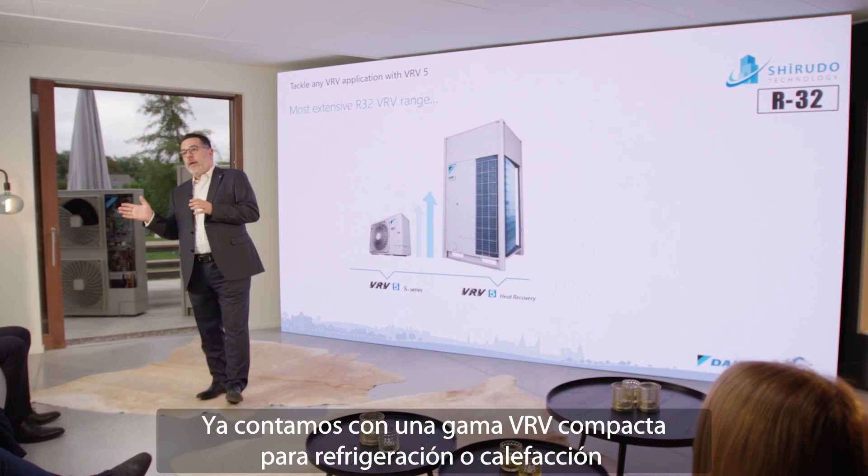Already today, we have a compact cooling or heating VRV range starting from 12 kilowatts and followed by a heat recovery range reaching up to 90 kilowatts in heating. Today, we are proud to introduce an extension of our heat pump with both side and top blow units, completing our portfolio.

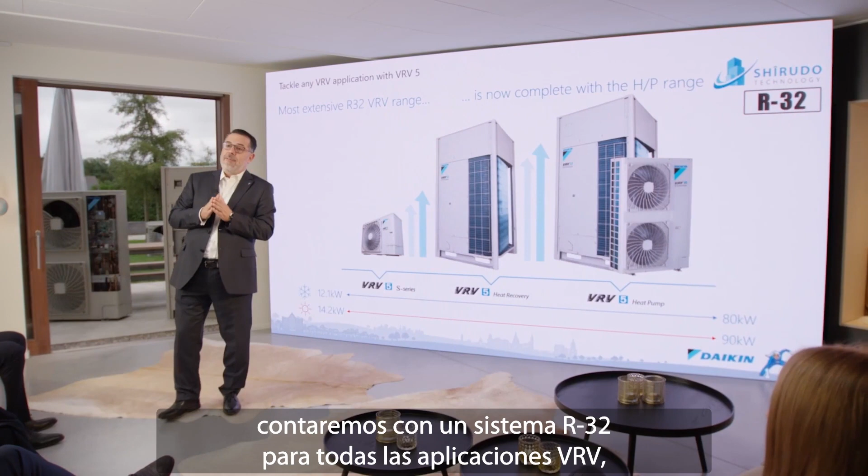This is the most extensive VRF range in the market today with a lower GWP refrigerant R32. As of the beginning of 2024, we will have an R32 system for every VRV application. And all this with all industry standards like continuous heating during defrost, integration of fresh air units, variable refrigerant temperature, a Daikin first, and all this optimized by innovative control technologies.

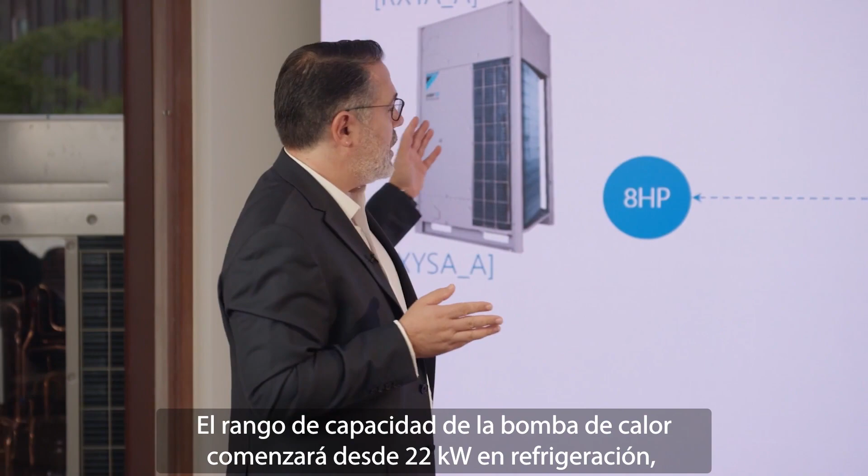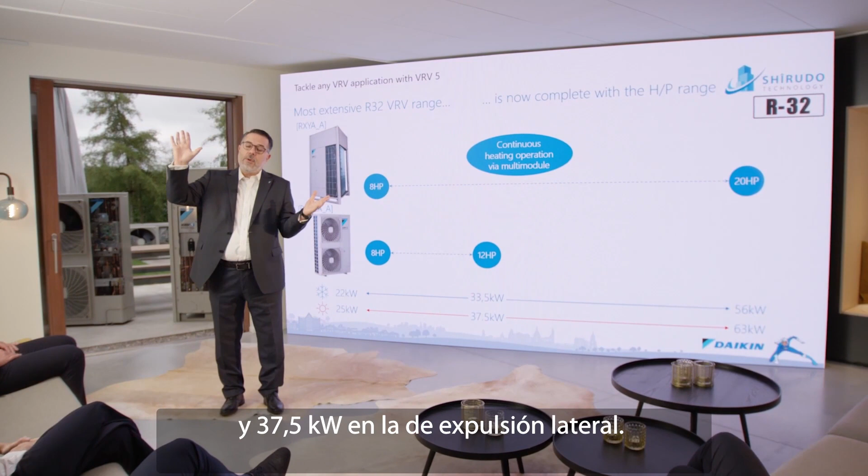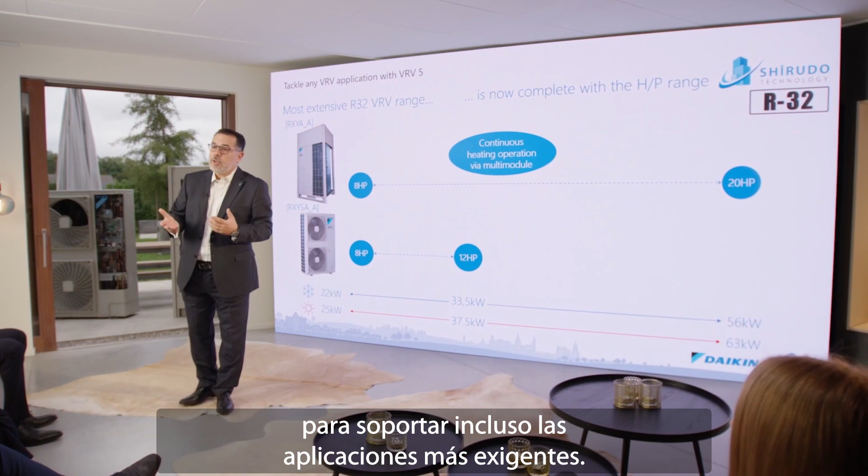The capacity range of the heat pump will be starting from 22 kilowatts in cooling, and it will go up to 56 kilowatts for the top blow and 37.5 kilowatts for the side blow. The units of the top blow range will also be offering continuous heating during defrost, another Daikin first, to support even the most demanding applications.

Climate is not changing—unfortunately, the climate has changed. Longer periods of hot and humid weather conditions and higher temperatures are not an exception anymore. For our new top blow range, we are extending the upper limit in cooling operation to 52 degrees, while maintaining this limit for side blow at 46 degrees Celsius. At the same time, you will be enjoying the same very extensive operation limits in heating, down to -20.

Many times we talk about comfort, wrongly referring to only room temperature control. Sound levels are as important, and this is increasingly tackled in legislation. I'm quite sure that all of you have been challenged with requests about sound levels.

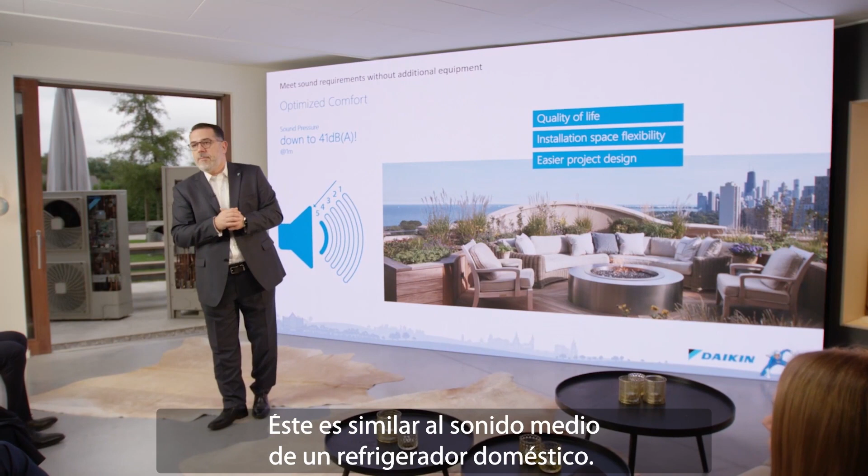At the lowest sound step, the system will operate in standard conditions with an operational sound of only 41 decibels. This is similar to an average sound of a domestic refrigerator. Of course, we will provide you with a full set of data of capacity for the different sound steps.

VRV systems have become a game changer in the commercial buildings market, also thanks to the very extensive piping lengths and heights. We analyzed thousands of designs done by our selection software and checked with market stakeholders, confirming that the piping lengths and heights offered already for many years by VRV4 are more than enough to tackle any VRV application.

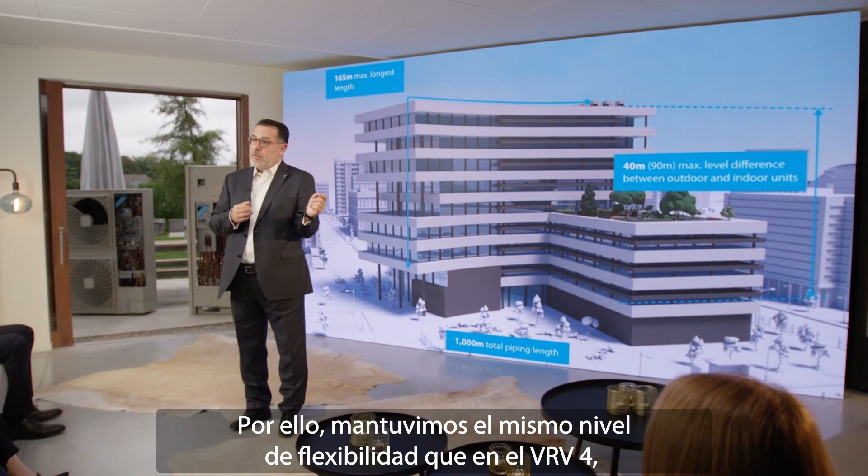As such, we kept the same level of flexibility as for VRV4, allowing, for example, total piping lengths of 1,000 meters, height difference between outdoor and indoor units up to 90 meters, and so on.

At this point, I want to remind you of the key elements that made VRV technology dominate the building market in the last 40 years. VRV is a top efficiency system that truly requires the least installation space and reacts to building load variations in minimum time.

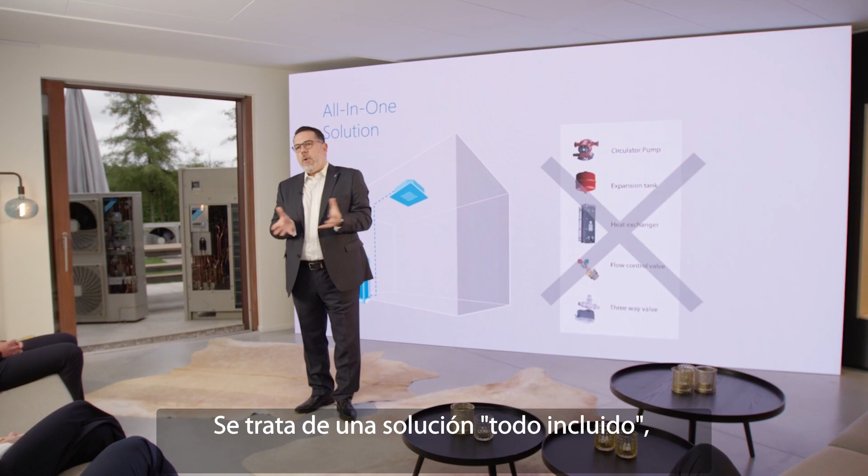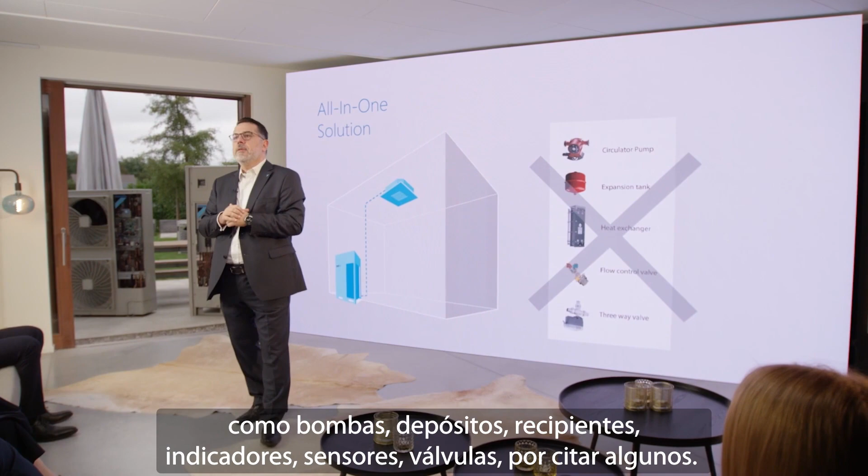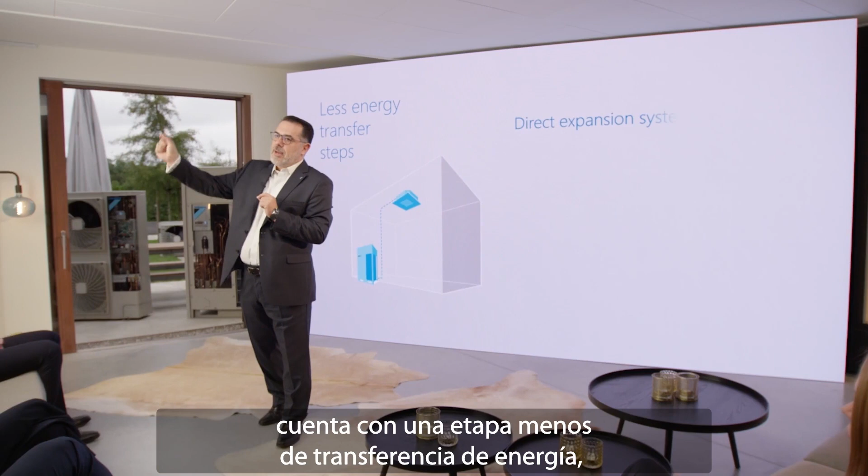It is an all-in-one box solution, not requiring any additional components such as pumps, tanks, vessels, gauges, sensors, valves, you name it. At the same time, referring to the thermodynamic laws, being a direct expansion system, it has one step less in energy transfer, making it impossible to supersede its efficiency by an equivalent air-to-water system.

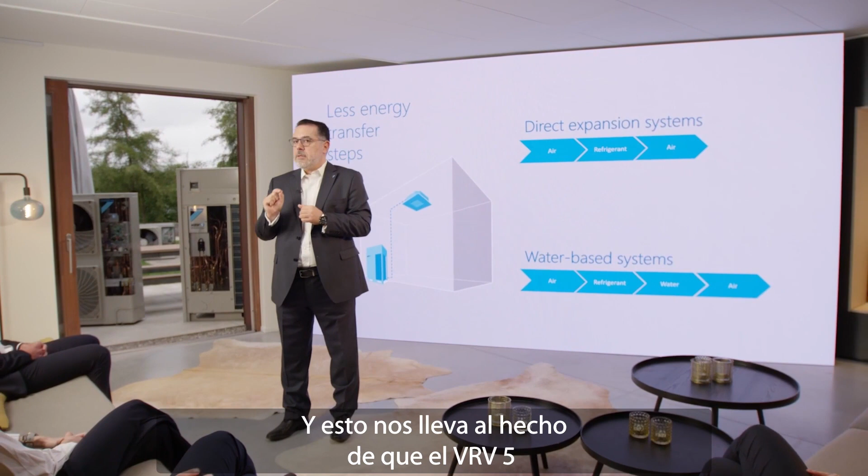And this brings us to the fact that VRV5 is a lot more than a flexible system with the broadest range of quick and easy to select and install units. Its main feature is also the main driver for its development: sustainability.

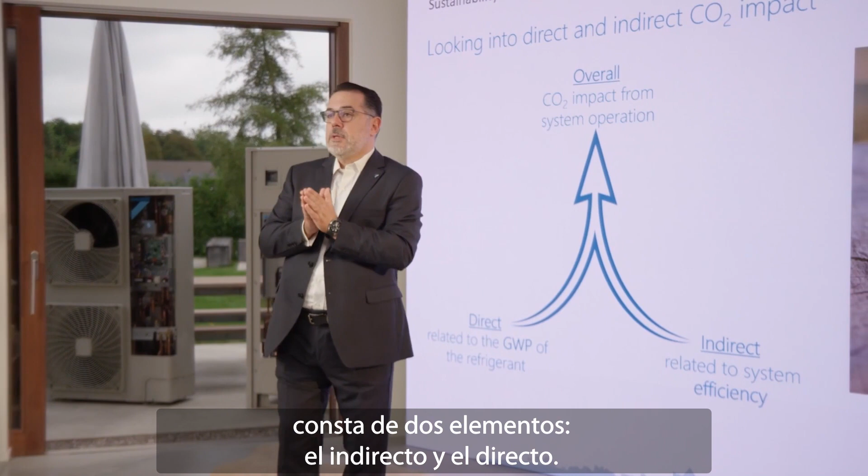Sustainability, when we talk about it, we need to consider our system's carbon footprint over its lifetime and what Daikin has done to contribute to the decarbonization of buildings. Firstly, I would like to refer to a fact: the carbon footprint of every air conditioning system consists of two elements, the indirect and the direct.

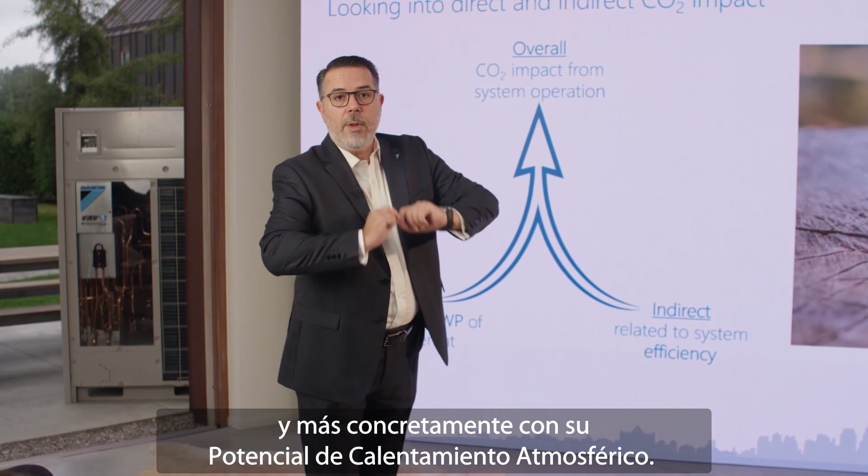The direct impact is about the refrigerant that is used, and more specifically about its global warming potential. The indirect one is related to energy that is used during operation over the whole lifetime, and as such with a seasonal efficiency. For our VRV5 range, we have adopted the lower GWP refrigerant R32.

Why? For this, I would like to ask one of the two leading engineers for this development, Martijn, to join me on stage and share with us some background. Martijn, please.

Thank you, George, for the short introduction, and thank you for the opportunity to explain from my side how we contribute to the important climate challenge that we are facing today globally. By choosing the new VRV5 heat pump R32 product, end users are contributing to reduce their climate impact without experiencing any drawback compared to the previous system.

One of the main reasons is R32 has 1/3 of the GWP value compared to R410A. Next to this, R32 has better energy characteristics compared to R410A, meaning with a lower volume you can achieve the same energy amount as R410A, which leads to a reduction of up to 10% in system charge.

This, together with a lower GWP value, means the direct impact of our system on the environment has been reduced by up to 71%. This is a huge achievement, George, considering we can still offer the same flexibility as the previous system. And next to this, R32, being a single component refrigerant, makes it easy to do recovery and maintenance.

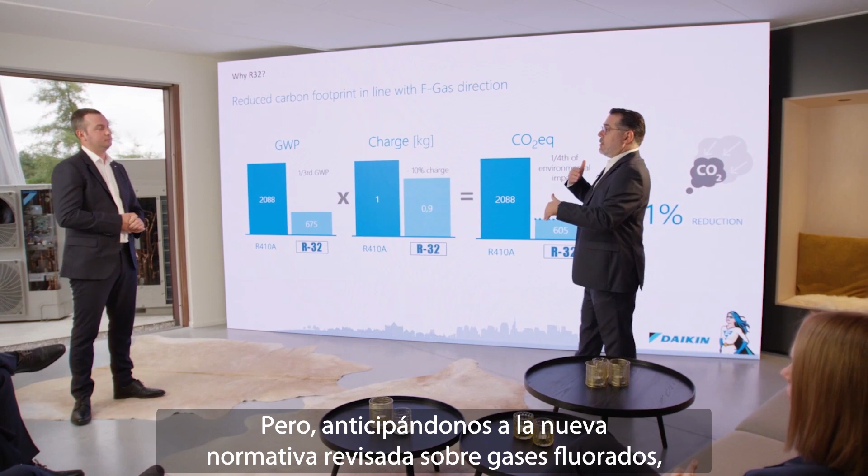Clearly, this is the best choice someone can make already today. But in anticipation of the new revised F-gas legislation, how is VRV5 contributing within this new legal framework? What are the benefits of VRV5?

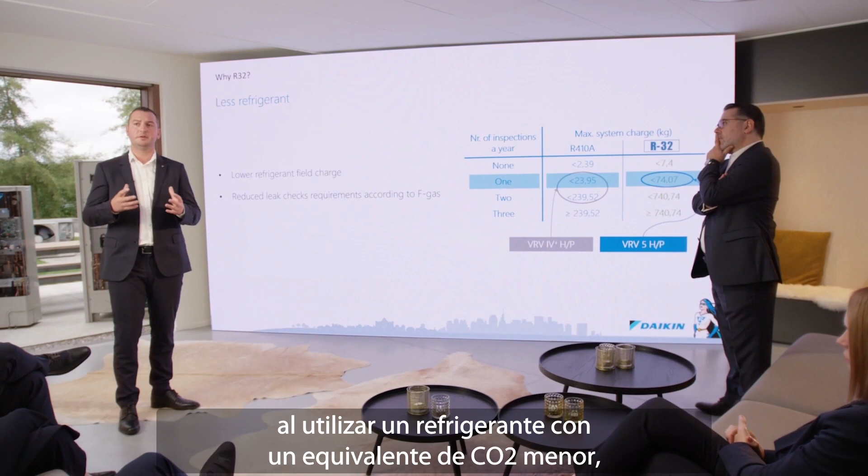One of the main driving legal frameworks within our business is the F-gas regulation. Practically, this means for an installer, by using a lower CO2 equivalent refrigerant, the amount of leak checks per year are being reduced. Compared to R410A, the amount of leak checks can go up to 3 to 4 times per year, depending upon the refrigerant charge. For R32, this is only once per year. This is another proof of the system's reduced impact.

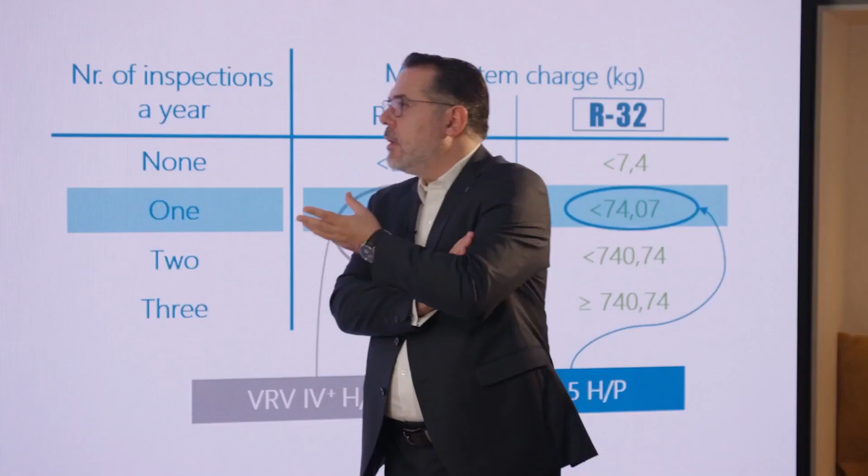This is very clear for me, but next to this, with regards to flexibility, what is this new VRV5 system bringing? What are the good points for our installers? Indeed, that's a good question.

As the market is evolving, to answer market demands, two of our key values during development are to increase installation efficiency and to offer flexibility. As an example, by going to R32, we can use smaller piping diameters and have less charge in the system, meaning quicker installation and lower installation costs. Next to this, to offer the same flexibility as the R410A system, we developed new header and joint kits.

This is really good news, but we have been talking today about sustainability and how efficiency contributes to sustainability by reducing the carbon footprint of our system through its lifetime. Do we have something to say about efficiency, some good news to share?

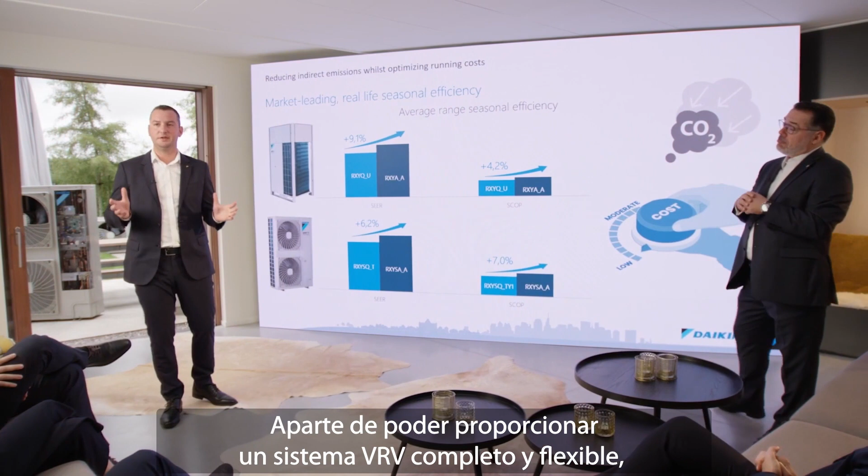Of course, I'd like to elaborate more on that. Next to being able to provide a complete flexible VRV system, we put a lot of effort into optimizing the energy efficiency of our system. Compared to R410A, we were able to increase the efficiency at several points.

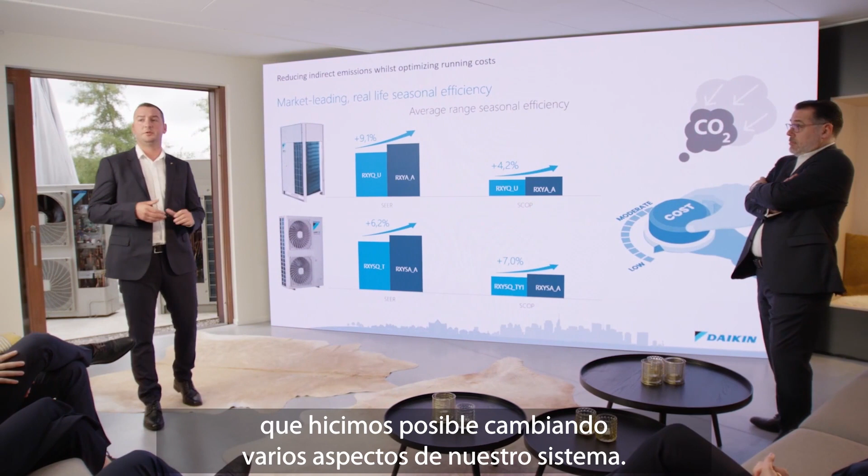I'd like to refer to our seasonal efficiency, which is tested with our most sold unit and tested at real conditions. This seasonal efficiency, we were able to increase by up to 9.1%. This is a huge achievement, which we achieved by changing several aspects within our system. One of those aspects is the compressor, which we changed to a better, more efficient one.

But this is only from a structure point of view. We also put a lot of effort into optimizing our system behavior. By using a new compressor, we can go to lower compressor speeds. This, in combination with R32, which requires a lower volume to achieve the same energy amount as R410A, means we can comply with lower load capacity demands compared to the R410A system.

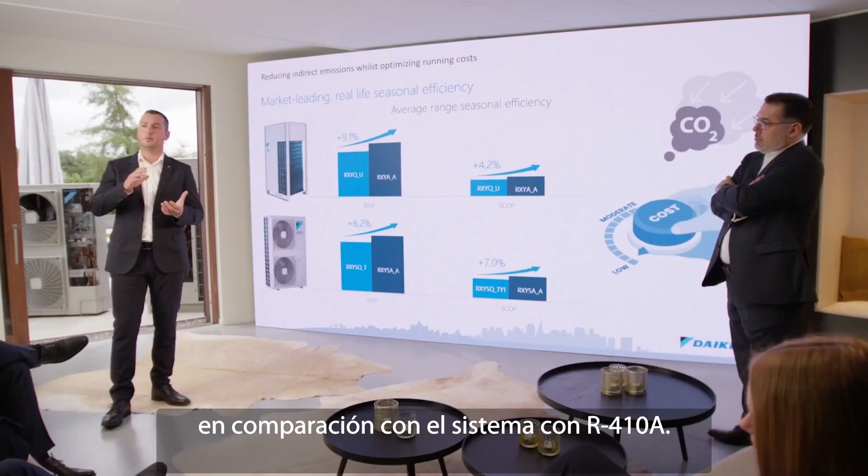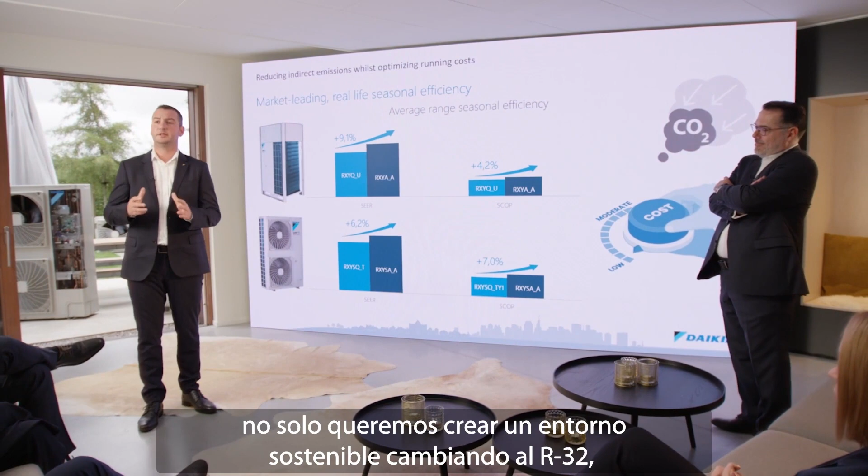This is only a small improvement, but I believe it will contribute to reducing the energy bills of end users. As engineers, we do not only want to create a sustainable environment by changing to R32, but we remain technically challenged during every development we do. This is a Daikin engineering mindset, always with the urge to improve.

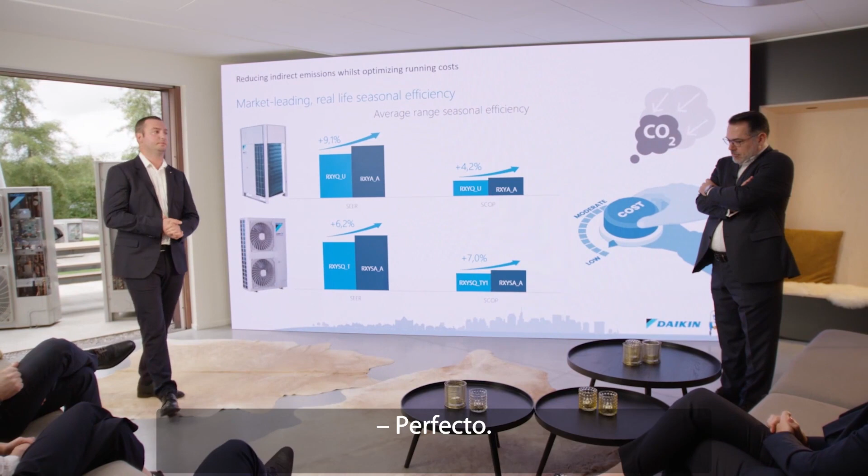But I really feel tempted now to ask you, since we're both engineers, tell us a bit more about this new compressor we have in our VRV5, some technical aspects of it.

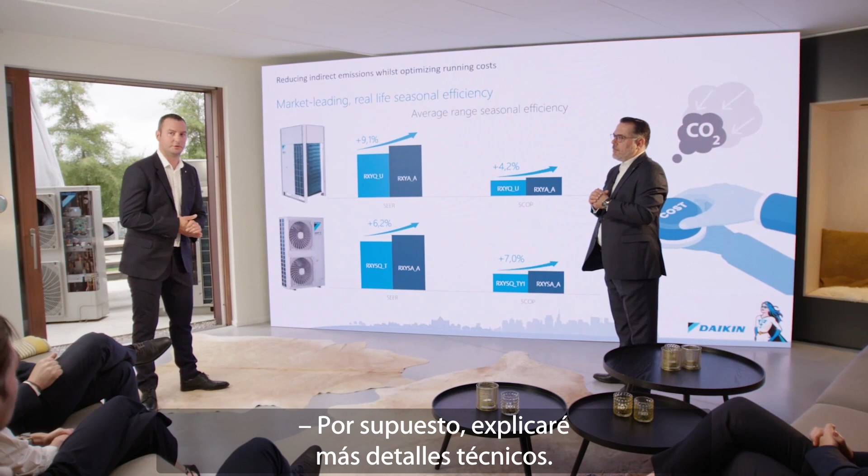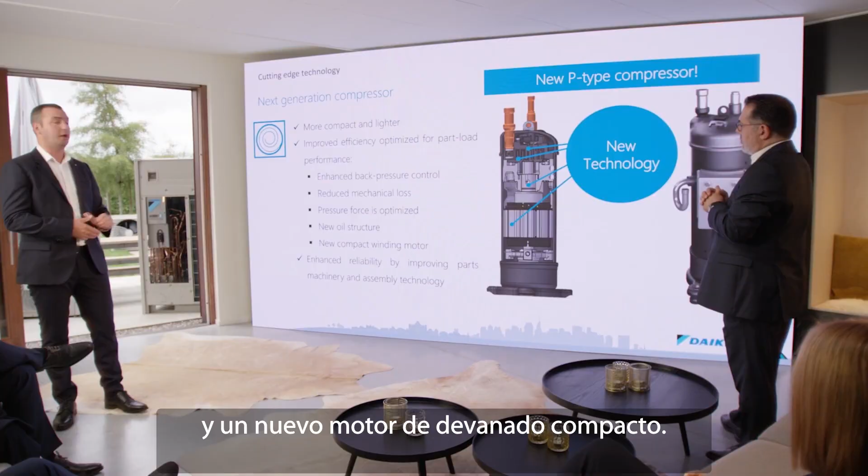I'd like to explain some more technical details about this new compressor. It's more compact, it's lighter. Next to this, we were able to optimize efficiency at part load conditions. With new enhanced back pressure control, we reduced the mechanical losses. The pressure force is optimized. We have a new oil structure and a new compact winding motor. All this together leads to a better, more efficient compressor.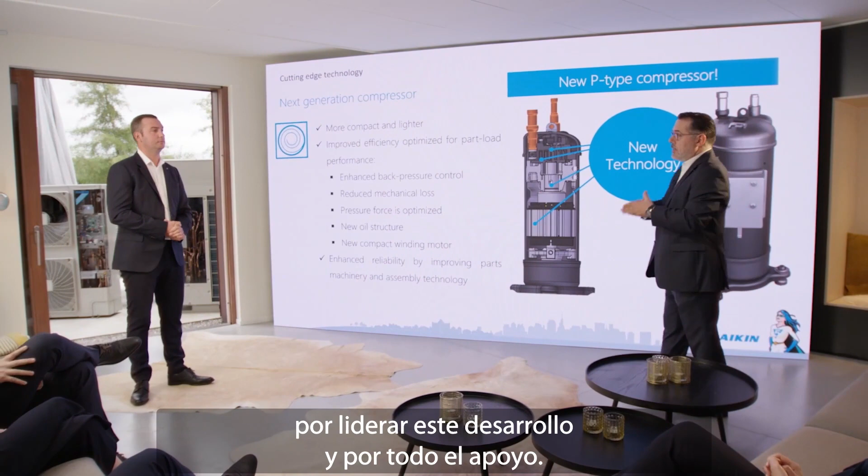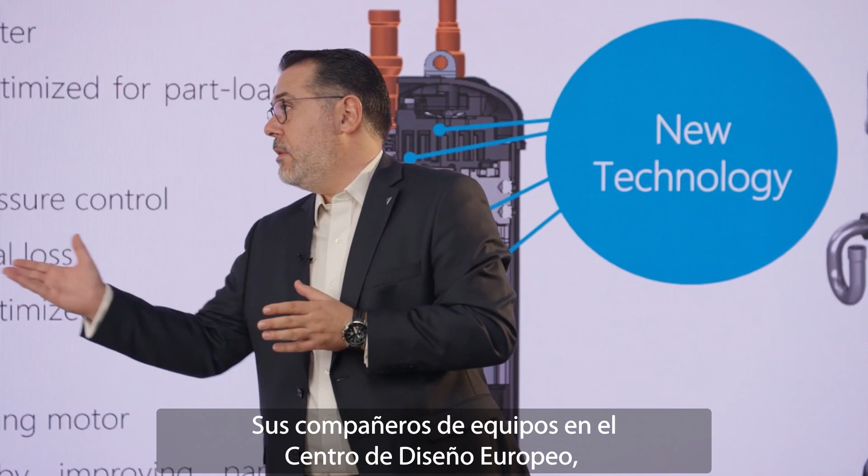Thank you very much, Martijn, for leading this development and for all the support. But I would like to also take this opportunity to thank all our colleagues involved in this development, your teammates in the European Design Center, our colleagues in compliance and quality, and mostly in production, who have made this unique range come to life. And with this, I would like to share with you another benefit, or should I say another proof, of how sustainable our system is.

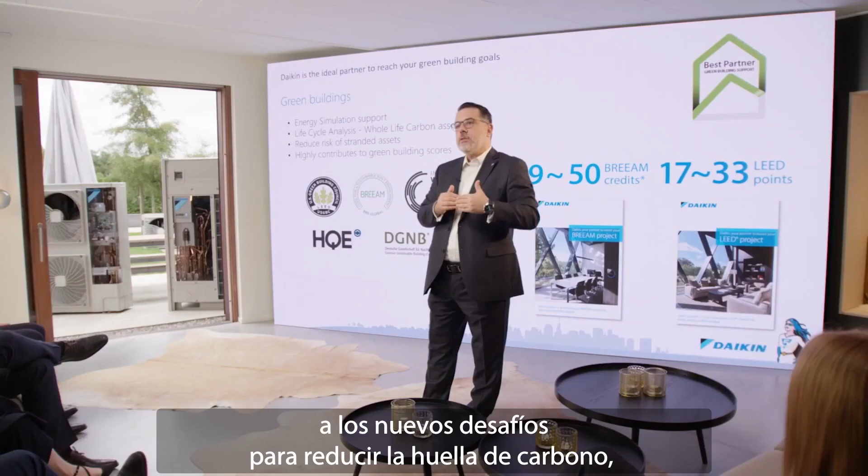The building industry is also adapting to the new challenges for a lower carbon footprint, yet healthier and more comfortable environment. More and more buildings are built or renovated to meet the requirements of schemes like BREEAM, WELL, LEED, HQE. Daikin VRV5 can contribute significantly to office spaces reaching top classification.

At this point, I would like to invite another engineer in the product management team, my colleague and teammate, João, with whom we will continue this amazing journey of technology, sustainability, and intelligence into the future. We will share with you secrets about our innovative Shirudo technology. João, please.

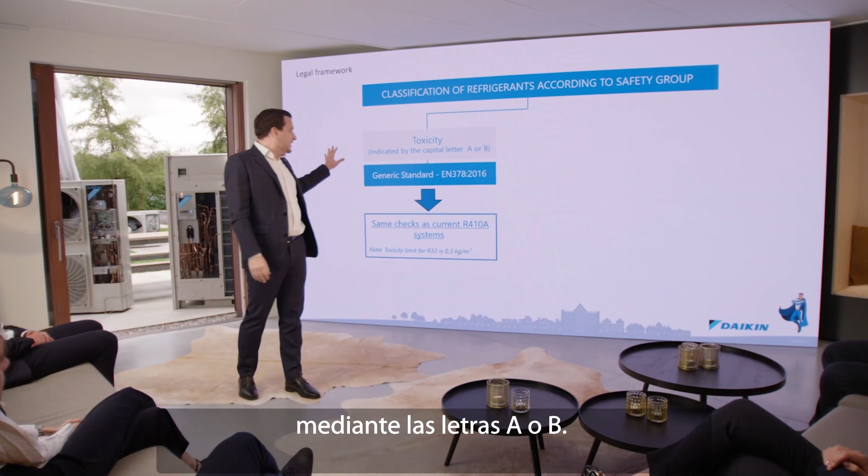Its benefits have already been demonstrated today, but how about its challenges? For that, we need to understand how refrigerants are classified according to their safety group, and what are the relevant regulations that guide them. Refrigerants are classified according to their toxicity, by letters A or B, and there's little difference between R410A and R32. Both are classified as class A, low toxicity.

The guiding regulation for toxicity is a well-known standard in our market, EN 378, and the sole difference is the slightly lower toxicity limit of R32, so you can follow the exact same procedures as for R410A.

Refrigerants are also classified according to their flammability, using numerical classifications from 1, non-flammable, to 3, the highest level. And here lies the biggest difference regarding safety classification group between R32 and R410A. R32 is a class 2L refrigerant, meaning mildly flammable, whilst R410A is class 1, non-flammable.

For flammability, we need to refer to IEC 60335-2-40, currently on edition 7. Why? Because although other standards also offer guidance on this, the IEC is a specific product standard which supersedes other generic standards, like EN 378.

From a practical perspective, what is changing in the design and installation of our units with the shift to R32? Thanks to Shirudo technology, not much. What is Shirudo technology, and how does it work? We have prepared a short video highlighting the benefits of our Shirudo technology.

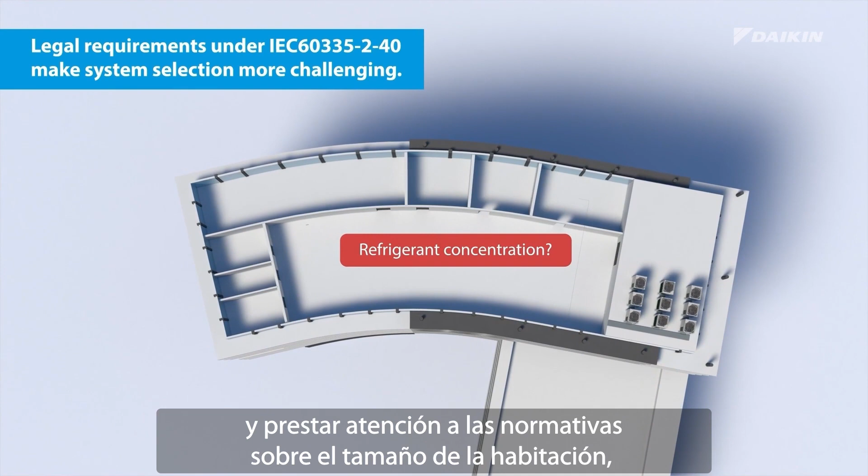Legal requirements make system selection more challenging. You will have to consider the remote possibility of a leakage, think about refrigerant concentration, and look out for room size regulations. Unless you choose the VRV5 with Shirudo technology.

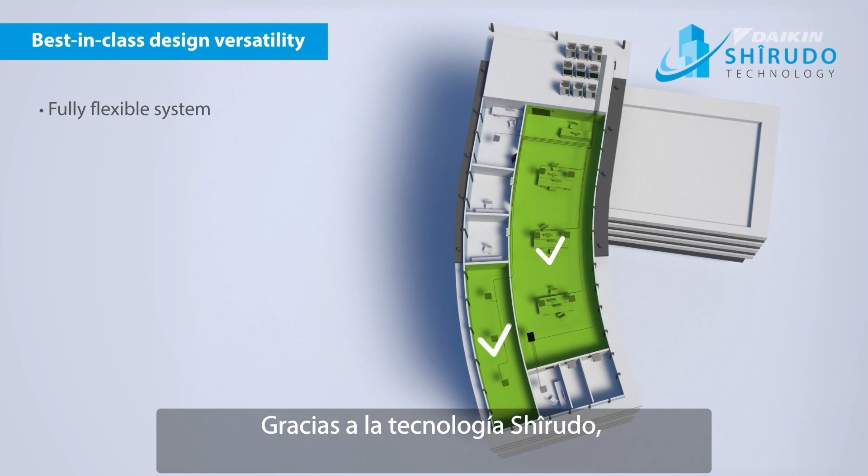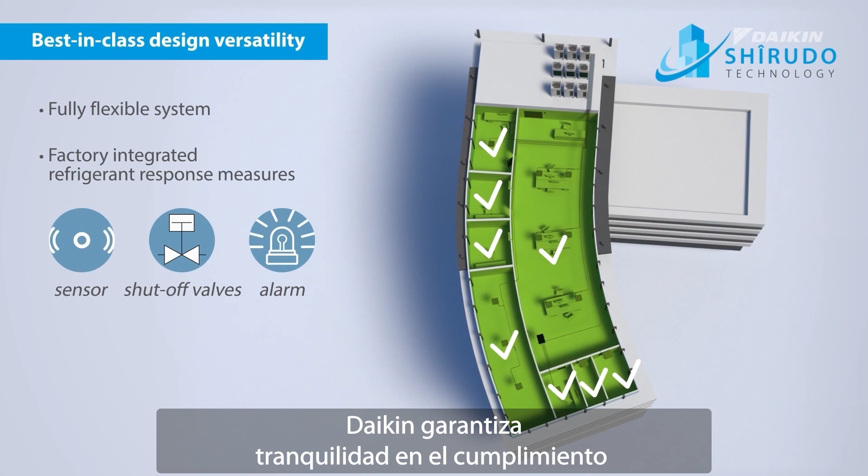With Shirudo technology, you have a very versatile system to accurately control the indoor climate. Thanks to factory-integrated refrigerant response measures, Daikin guarantees peace of mind for compliance with the specific product standard IEC 60335-2-40 out of the box. And it's also third-party approved by a notified body.

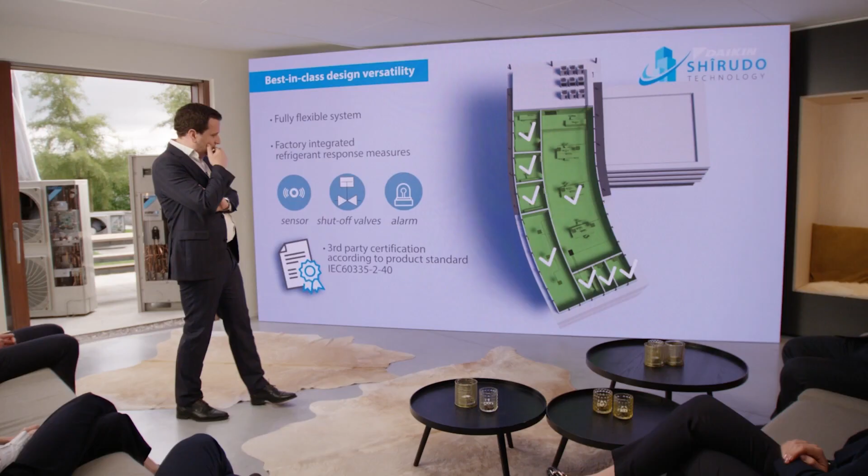Why Shirudo technology? The name derives from the Japanese words for shield and protect. We developed it to allow installation of our VRV systems using mildly flammable, lower GWP refrigerant into the same type of applications as its R410A predecessor. The factory-integrated refrigerant control measures make the system as easy and flexible to design and install.

We have integrated into our systems the IEC-required refrigerant control measures, leak detection and alarm, fully factory mounted into our units, meaning no additional hurdles either to design or to install. The audio and visual alarm is integrated into our Madoka remote controller, and the leak detectors are fully factory mounted into our indoor units, imposing no visual impact either.

In addition, we have combined it with cutting-edge technologies and specially developed algorithms that allow us to achieve a fully optimized response logic, taking full benefit of Shirudo technology and maximizing its impact.

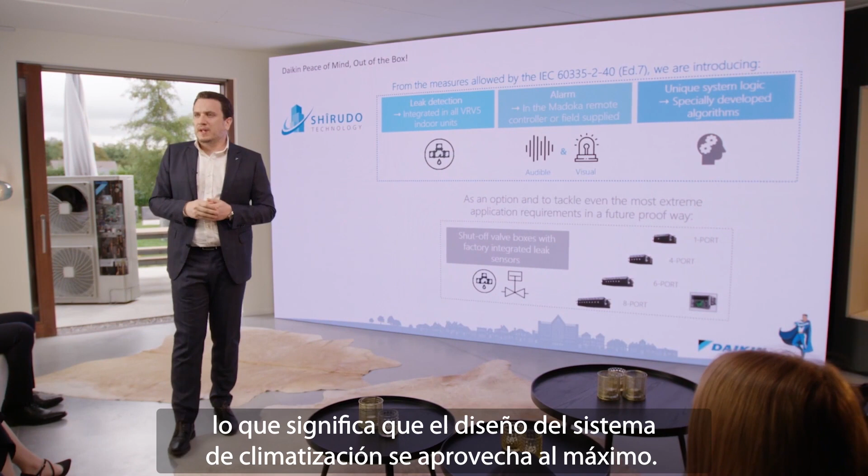To tackle even the most stringent applications, we are making available as an option a range of shut-off valve boxes, meaning there is no room left out of your HVAC system design. The boxes will be available in a wide range from 1 to 8 port configurations, fully adjustable to your building needs. And each port is fully independent, meaning that even in the remote case of a leak, only the specific units connected to that port will need to stop operation.

Last but not least, we have our system CB certified, enabling us to confidently answer any challenge you might receive from your customers. With this, I believe we have a complete offer and package, making Shirudo technology a real game changer in the adoption of lower GWP refrigerants in VRV systems.

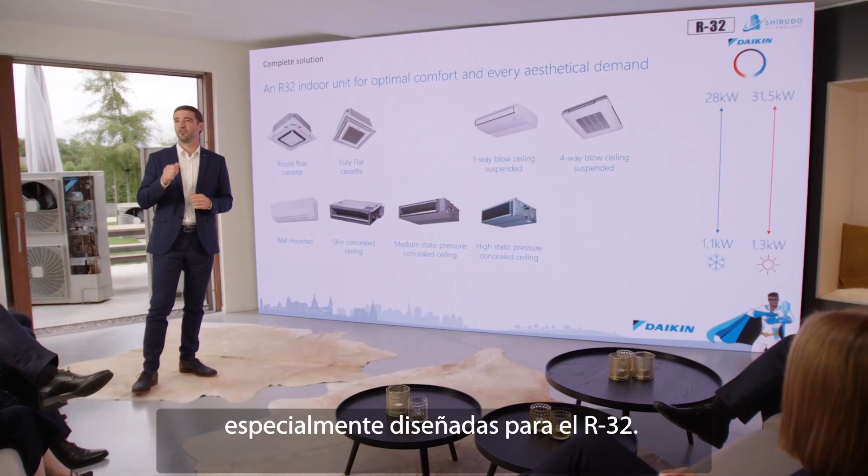It sure is. With the launch of our VRV5 heat pump, we're bringing new indoor units, new fresh air devices, and new controls. Let us look at our indoor units first. In the last 3 years, we have already introduced our most popular ranges specifically designed for R32. Now, we're completing our portfolio to provide the highest comfort, catering any type of room.

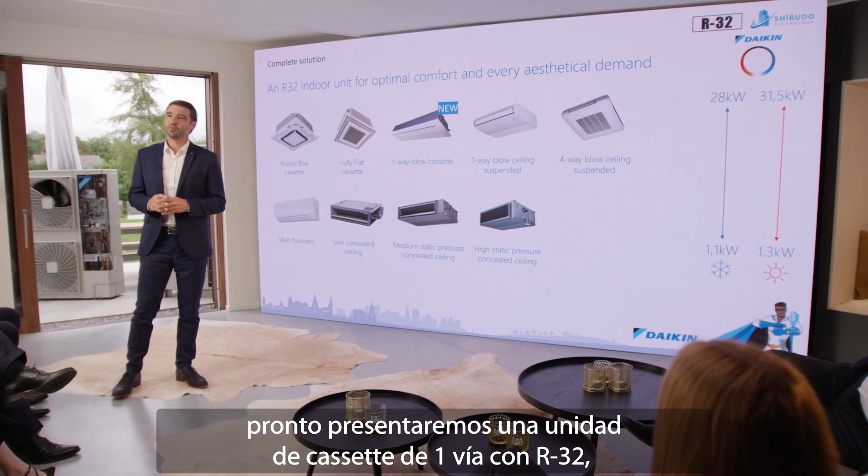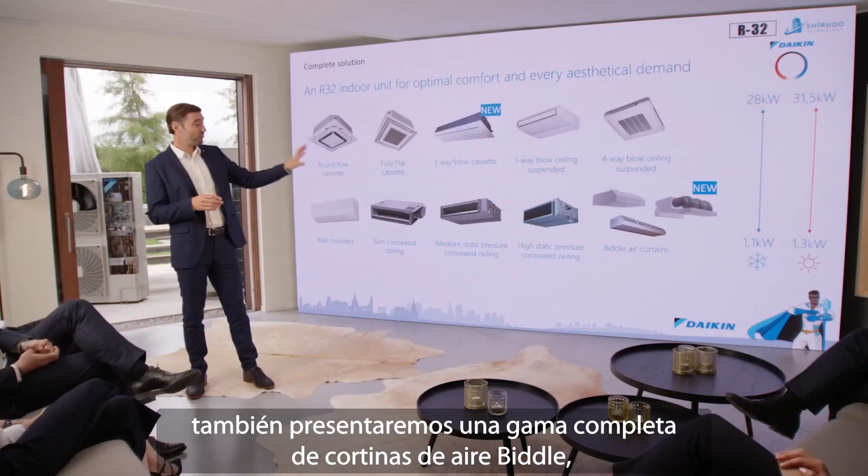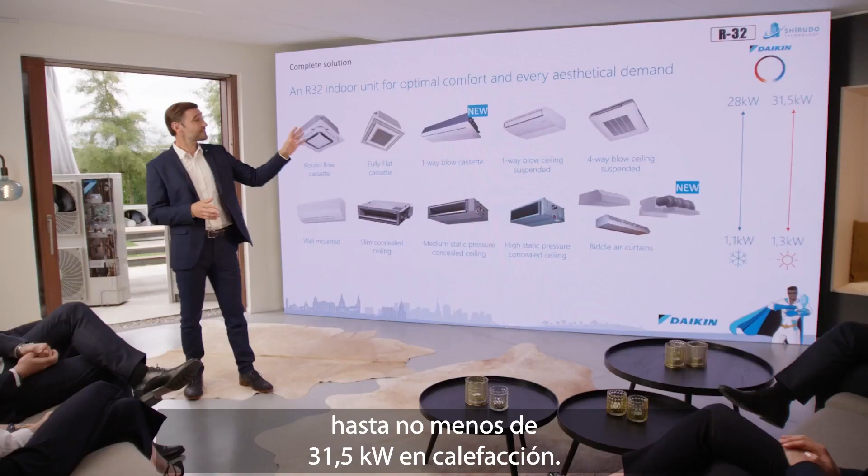Therefore, we are introducing soon a dedicated R32 one-way blow cassette with a completely renewed outlook. On top of this, we introduce a full range of Biddle air curtains, also completely redesigned, making the most complete R32 range in the market today. We are covering capacities from 1.1 kilowatt in cooling up to no less than 31.5 kilowatts in heating.

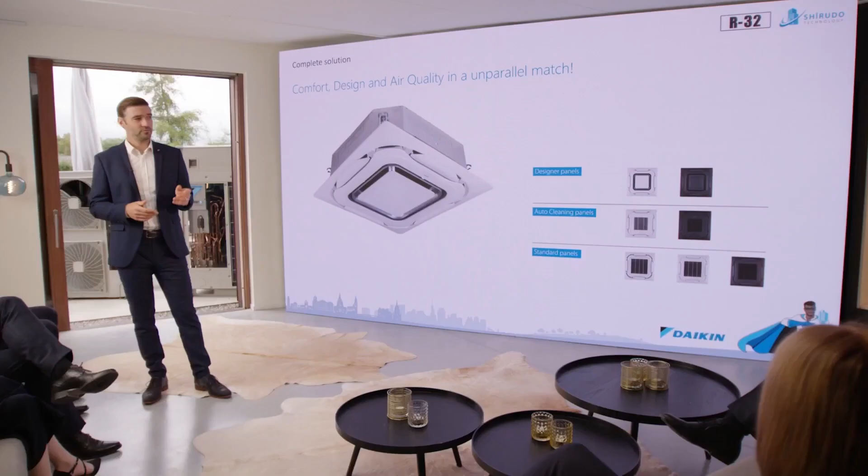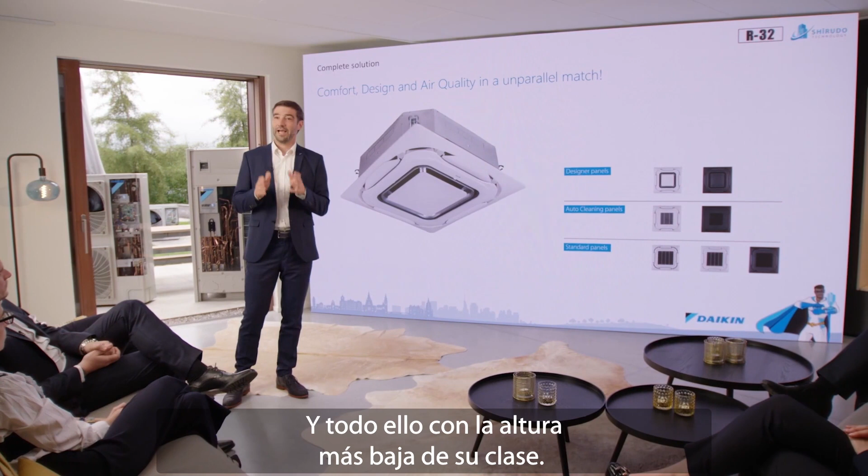And we don't stop here. We are continuously bringing novelties to satisfy the ever-changing market demands. Let me give you one example, our round flow cassette. With this model, we've been innovating the market for years. We were the first to introduce 360-degree airflow, presence and floor sensors, individual air flap control, and a wide range of decoration panel variations. And all of that in the lowest built-in height in its class.

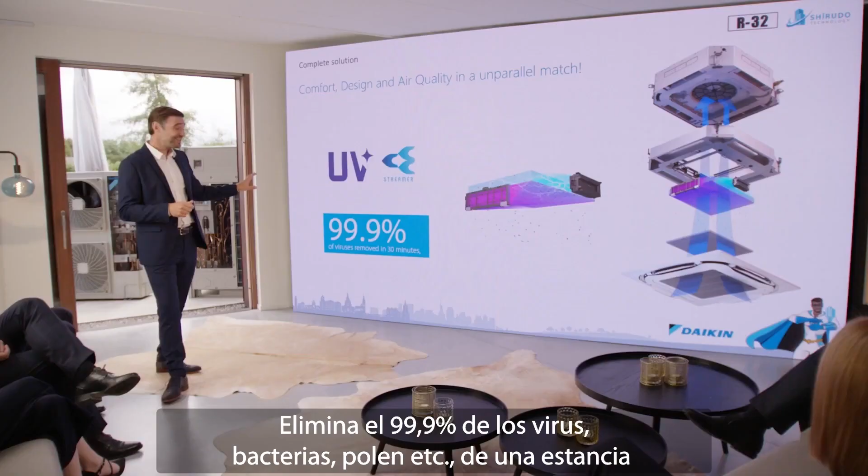And this year, we bring another new innovation, the UV Streamer Kit. This kit introduces powerful air purification to our cassette, thanks to the UVC LED and Flash Streamer technology. It removes 99.9% of viruses, bacteria, pollen, etc. from a room, and that in just 30 minutes.

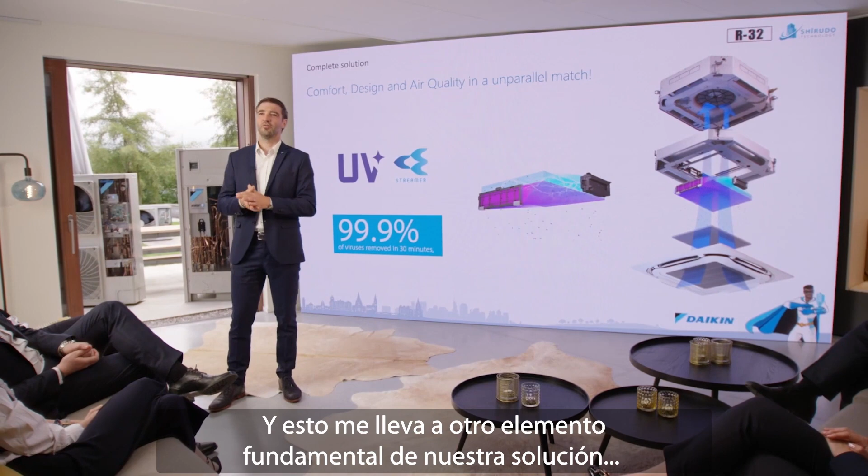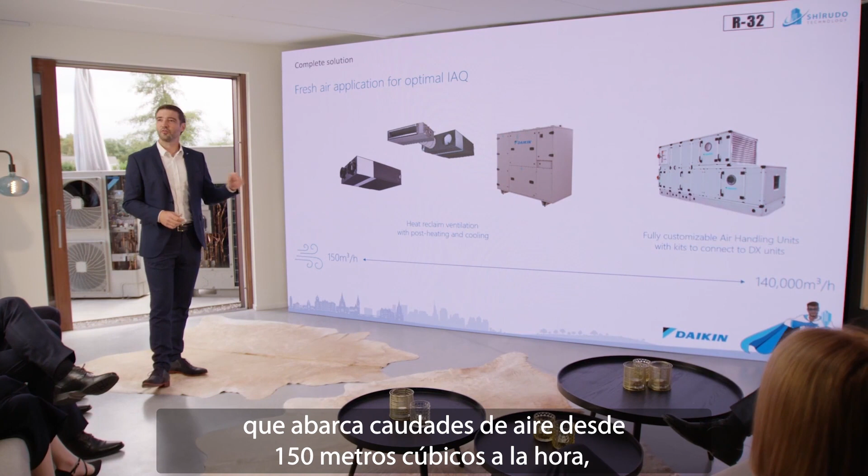And this brings me to another essential element of our solution, indoor air quality and fresh air. Indoor air pollution can be up to 5 times higher than outdoors, and typically we spend more than 90% of our time indoors. Therefore, a true total solution must integrate fresh air to guarantee a high quality of life to our users. As a result, we offer a unique portfolio covering airflows from 150 cubic meters per hour up to no less than 140,000 cubic meters per hour. Any fresh air requirement can be covered.

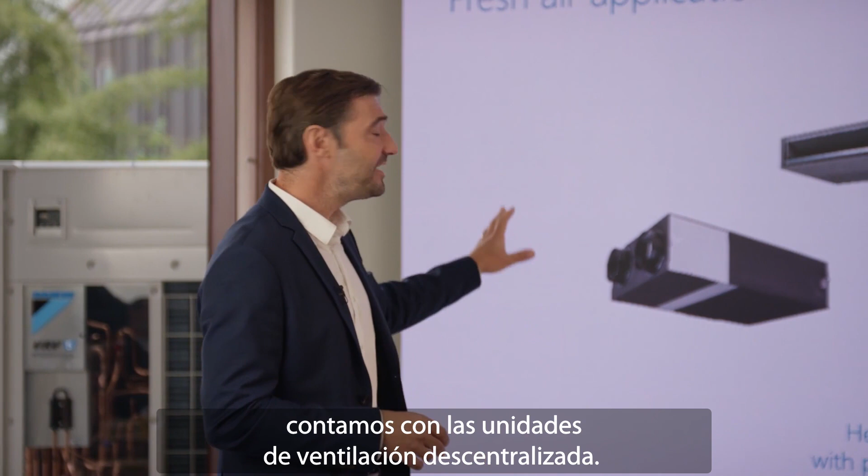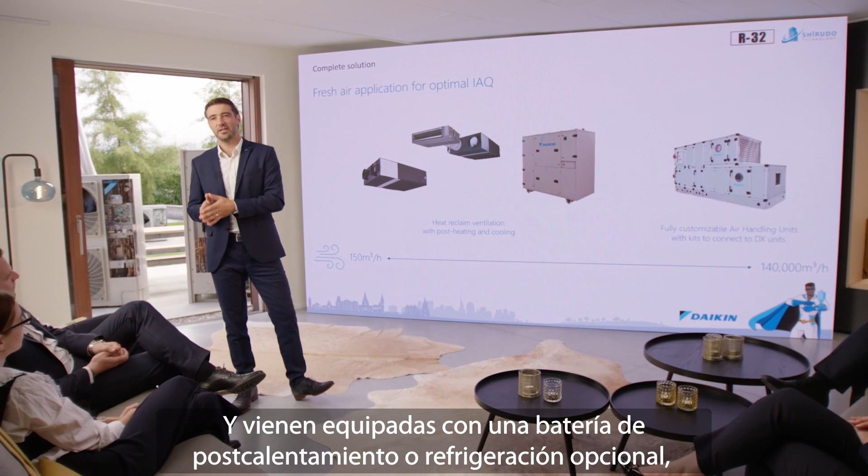On the one hand, we have decentralized ventilation units. They can recover both heat and moisture. And they come with an optional post-heating or cooling coil, which can be fully integrated with our VRV5.

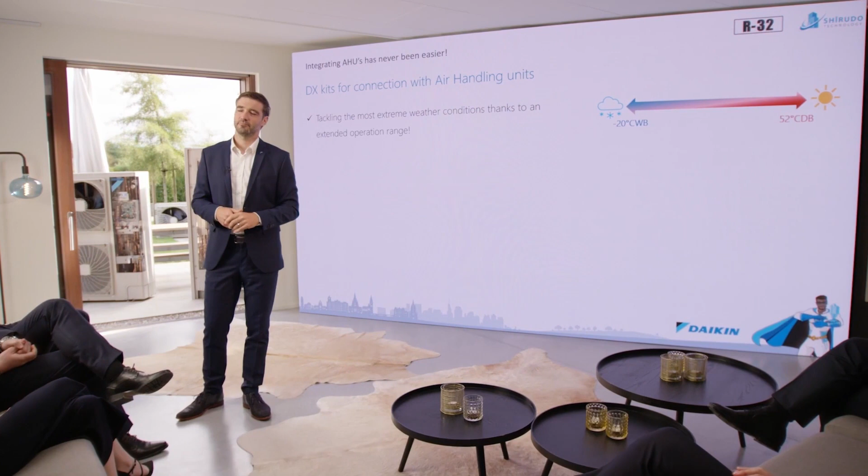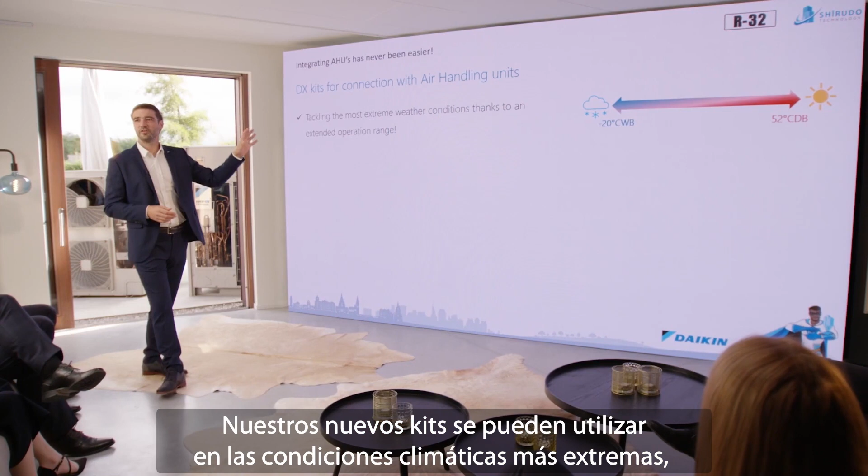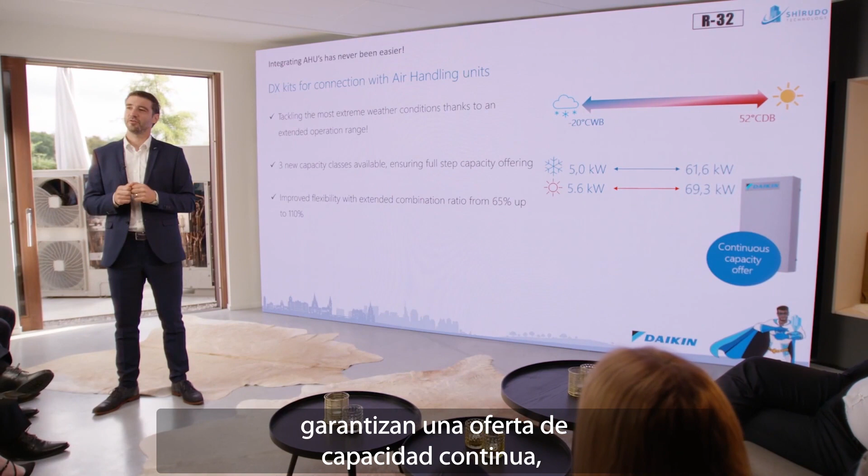On the other hand, we offer fully customizable, centralized air handling units. And they can be easily integrated thanks to our new air handling unit kits. In fact, integrating air handling units has never been easier. Our new kits can be used in the most extreme weather conditions, from -20 up to 52 degrees Celsius. 3 new capacity classes ensure a continuous capacity offer from 5 all the way up to nearly 70 kilowatts. And an extended combination ratio further improves flexibility.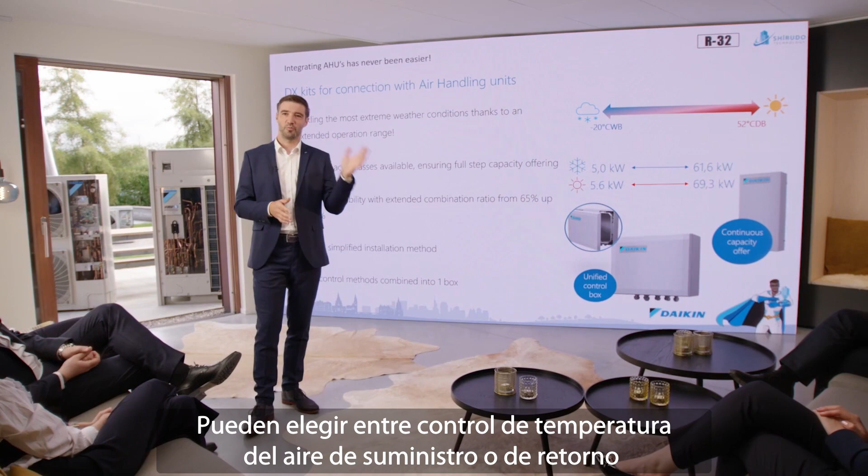Finally, installation is further improved by a hinged door and a control box offering 5 different control possibilities. You have the choice between supply or return air temperature control and either a Daikin integrated or third-party DDC controller.

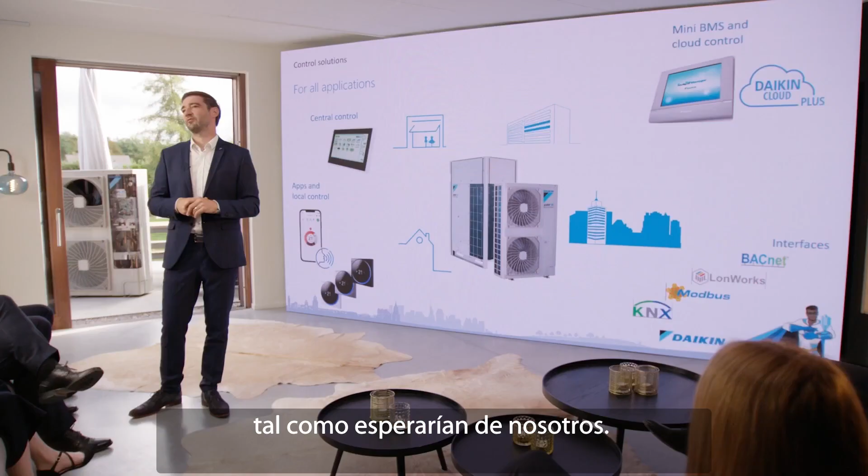Now, since a heat pump is only as efficient as its controls allow, we're also here proud to offer a full range of options, as you would expect from us. From residential to large commercial use, we can offer you the solution for any type of application. Individual or centralized control, on-premises or in the cloud, via an app or through one of our many interfaces. They are all designed to be the easiest to integrate and easy to use. And they meet the latest developments in the industry.

Let me highlight our newest cloud-based mini BMS, the Daikin Cloud Plus. A full cloud-based control and monitoring platform. End users get multi-site management and remote monitoring, allowing easy energy consumption follow-up with insights. As an installer, you benefit from remote maintenance and diagnostics. And you can even do field settings remotely.

Finally, the cloud connects to any DX heat pump we offer. And it also allows you to integrate third-party devices, such as alarms, lights, and so on. And this in a very cost-effective way.

Dear viewers, I'm confident that our VRV5 will enable you to design and build the sustainable, low-carbon building of tomorrow already today. And to help you with the design and implementation, we're also here to support you. My colleague Anja, sustainability expert and green building specialist, can tell you all about it. Welcome, Anja.

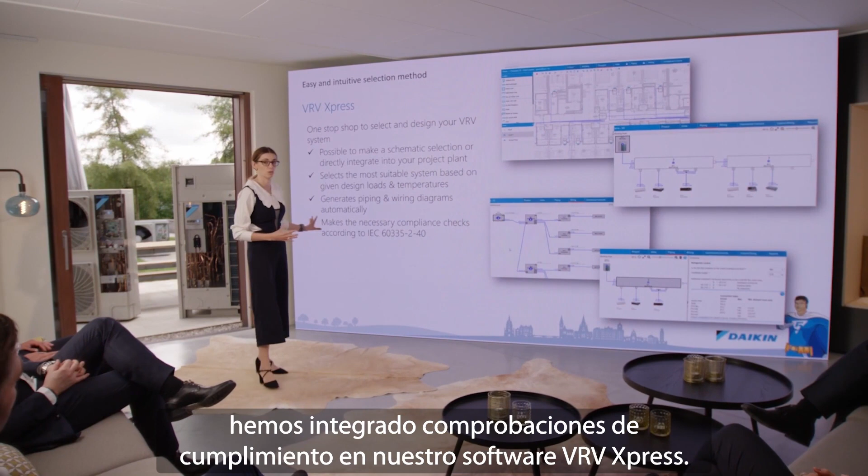We have all heard about the VRV5 product specification and the importance of complying with regulations. To further support the selection process of VRV5, we have integrated compliance checks in our VRV Xpress software. The tool enables us to design the system in floor plan mode, where automatically all the piping can be recalculated.

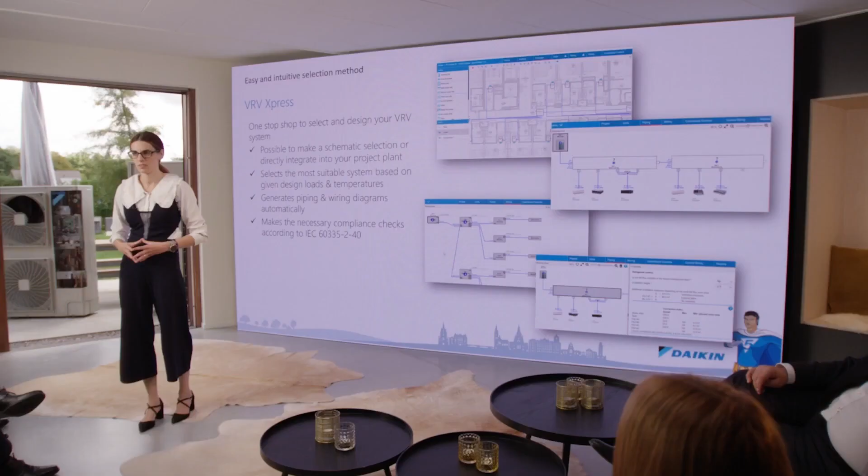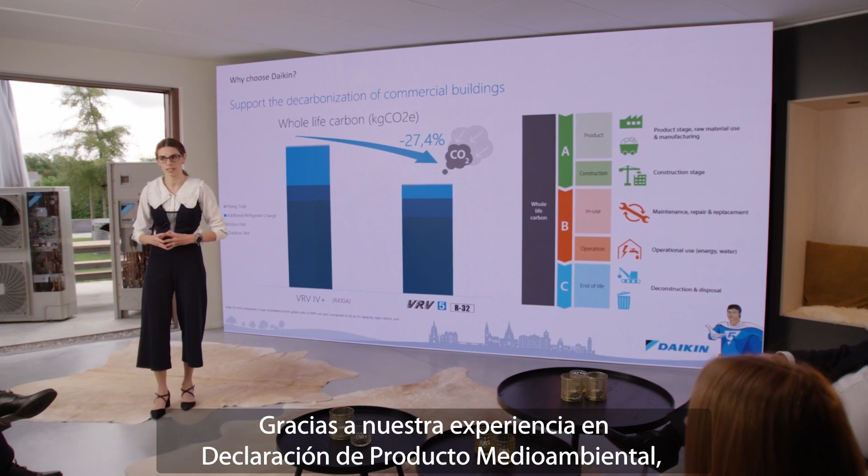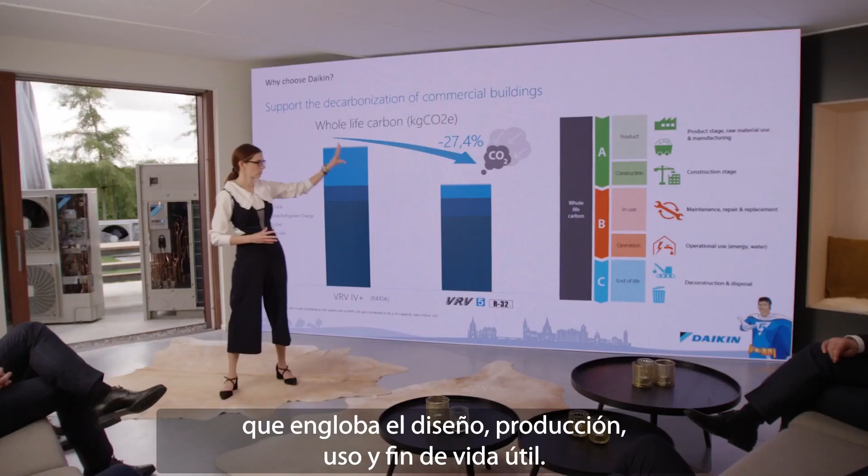VRV Xpress not only helps in the design of VRV5 series, but also allows selection of the whole VRV family. You just need to set up the design loads and temperature, and the rest will be taken care of by the software. Talking about support, Daikin consultants are also ready to advise you on the choice of the most environmentally friendly system. Thanks to our EPD, Environmental Product Declaration expertise, we can easily assess the impacts of usage of each technology during the whole life carbon of the product, meaning product and construction, use, and end of life.

As you can see, VRV5 allows you to reduce the whole life carbon of the product by about 27% compared to the previous series.

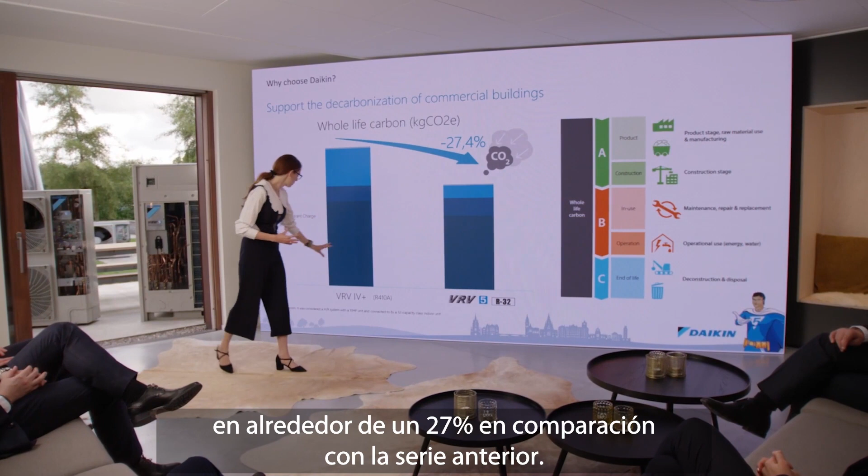Another way that we can support you: we can also offer a network of locally trained green building specialists, such as myself, that can support you in maximizing your score for BREEAM and LEED guidelines. My team took a significant effort to deliver a guideline for consultants and investors to show how the scores can be obtained. And to recall, VRV5 gives you an extra scoring in terms of refrigerant used on the building site.

In the same context, we have also built expertise on legislation, airflow simulation of outdoor unit, and sound, in order to be able to advise on correct design of the system. And to further support the design phase, we can offer an easily accessible BIM object library where you can find any Daikin unit. Based on this, I would like to show how we have managed to deliver adequate consultancy in one of our projects in France.

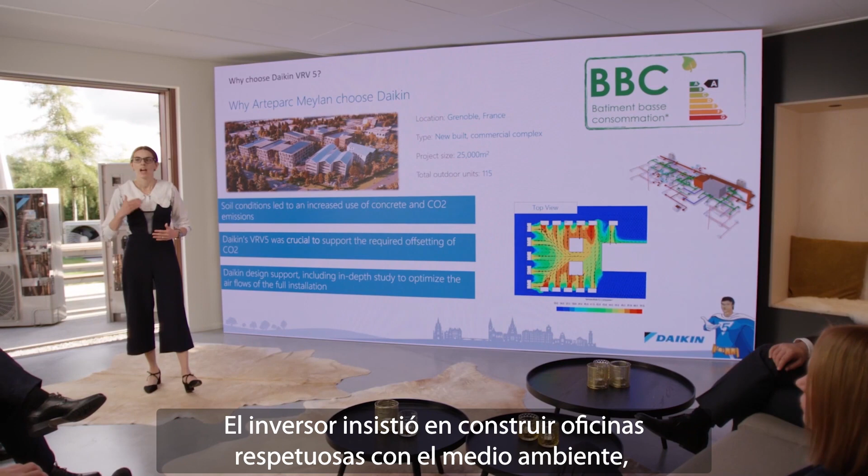Arteparc Meylan is a modern commercial complex constructed in the region of the Alps. The investor insisted on constructing environmentally friendly office spaces where the carbon footprint was of paramount importance to guarantee a highly performant building. Due to the problem with soil condition, more concrete had to be used for building foundations. This contributed to a high embodied carbon value, which had a negative impact on final building score and resulted in failing the CO2 emission threshold imposed by local regulation.

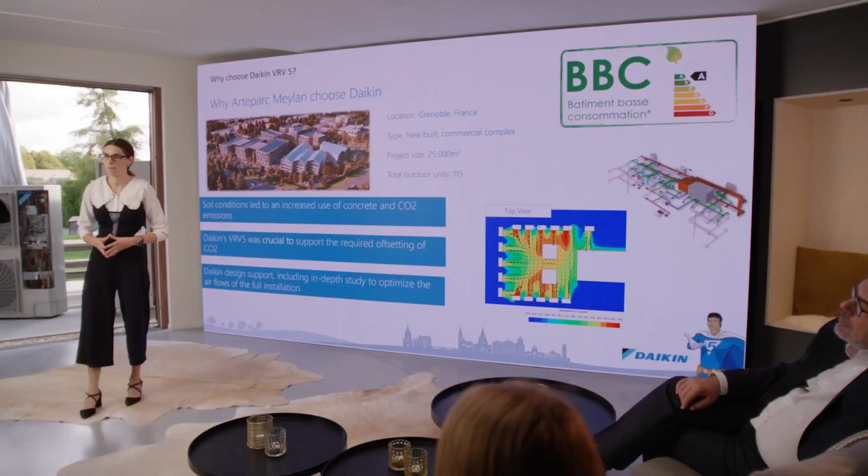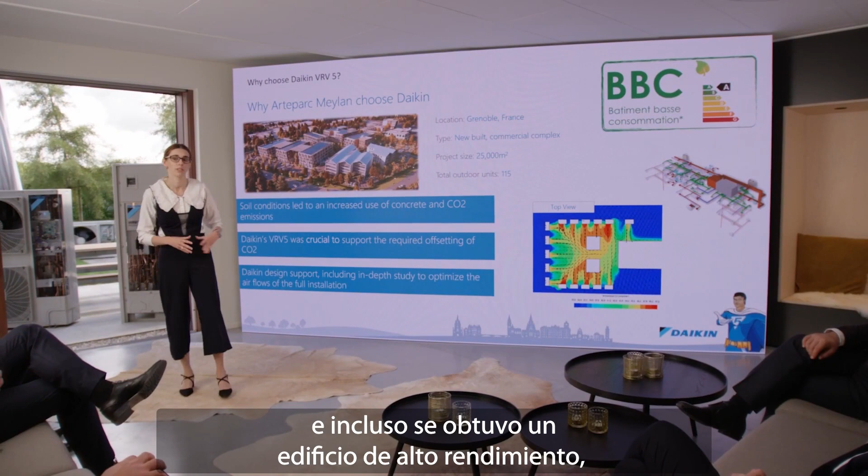Thanks to Daikin's solution on R32, meaning VRV5, the negative impact from usage of more concrete could be neutralized due to low GWP, and even obtain the highly performant building as required by the investor.

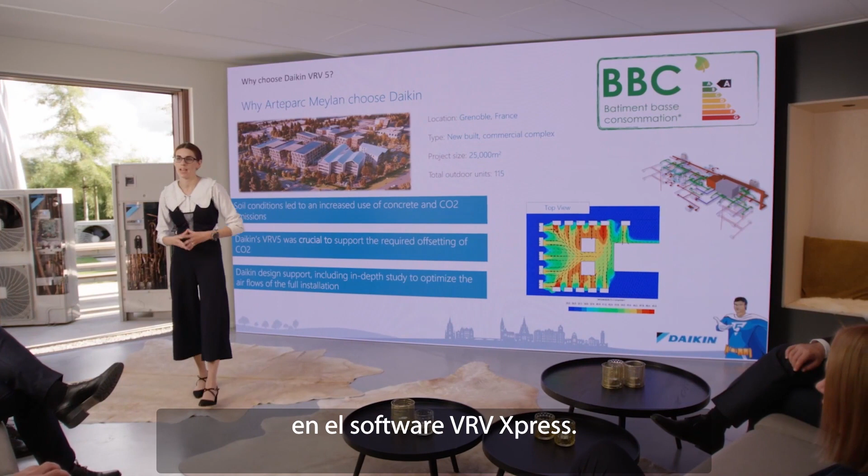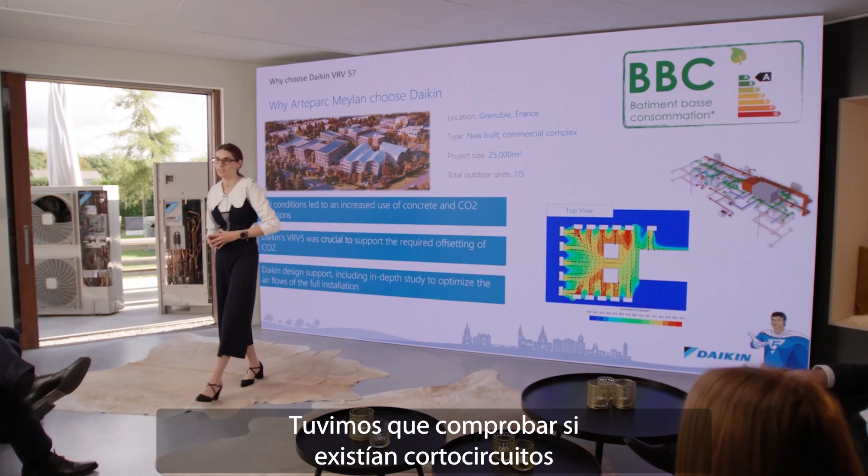Our consultants made the proper design of more than 100 outdoor units in VRV Xpress software. On top of it, we have secured the proper operation of the system by delivering the airflow simulation, where we had to check if there were some short circuits, because there was a limitation of technical space.

Another interesting case where our support and technology were relevant is a hotel in Amsterdam. This was an already existing hotel that needed deep refurbishment to make it a future-proof solution, meaning it needed to be heavily decarbonized. Park Plaza is actually a historical building where its structure could not be modified, and the facade of the building had to be kept intact.

Being a hotel, the works on it had to happen in a brief time to secure the operation for guests, in order not to lose profit. That is why our consultants proposed the VRV5 heat recovery system, which not only has a low GWP, but also is an easy plug-and-play solution with low footprint.

That allowed for a quick commissioning and did not intervene in the building structure. The implementation of the VRV5 system was possible thanks to Shirudo technology, which secured system response in case of leakage and allowed for an optimal design to follow the regulations. It was possible to secure the installation for 150 rooms in an area as low as 25 square meters.